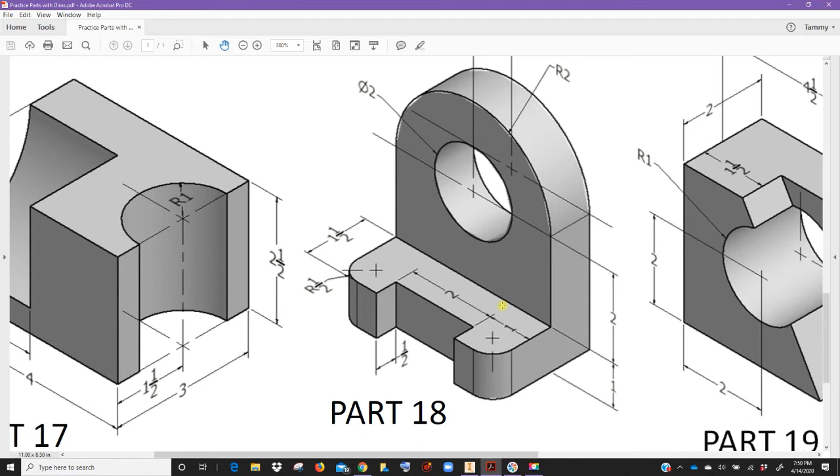It's up to you how you would like to draw this part. I'm going to draw it the way I think is easiest and that takes the least amount of steps. But again, you can do it many different ways. So let's look at part 18. So let's go to Inventor and let's start a new part. I'm going to start this on the front view. So I'm going to use the front view and start with that plane.

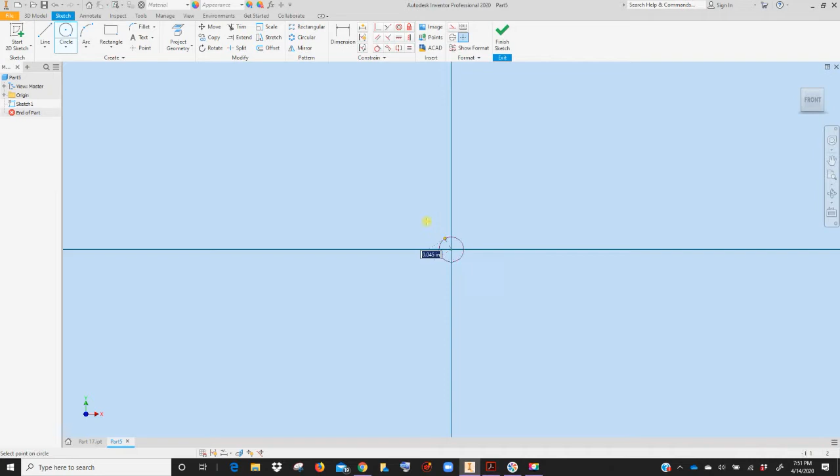So I'm going to look at my drawing. It tells me the bottom piece is 1 inch, then there's 2 inches to the center line, and then there's a 2-inch radius. So why don't we start with this 2-inch radius circle. And then I'm going to draw, see how I'm letting it just kind of grab and track back up. So let's trim this out.

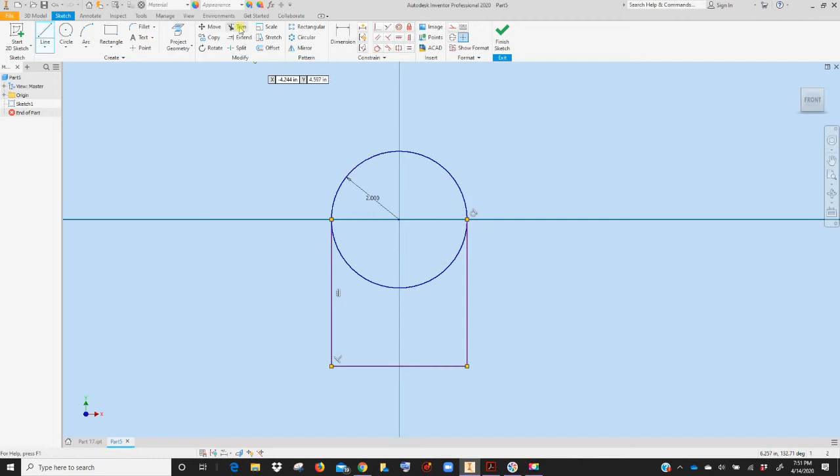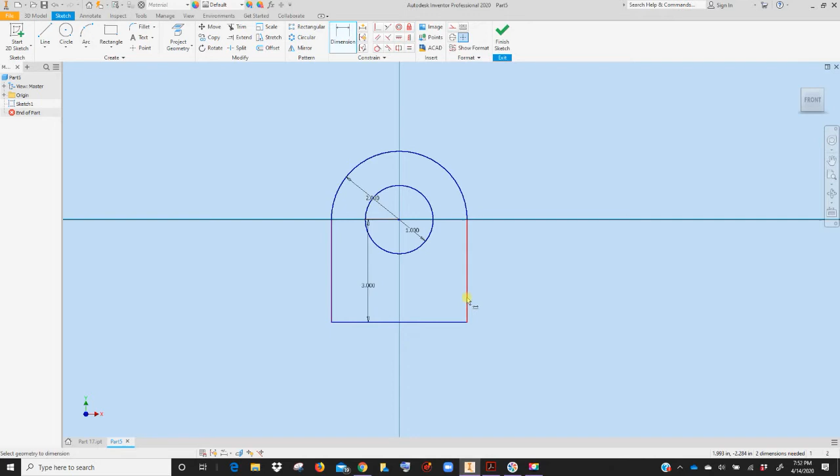And from here, I'm going to draw another circle. And that is a 1-inch radius. And then I need to put some more measurements, because from here to there should be 3 inches. So when I finish the sketch, I'm going to extrude this face out just 1 inch until this, okay.

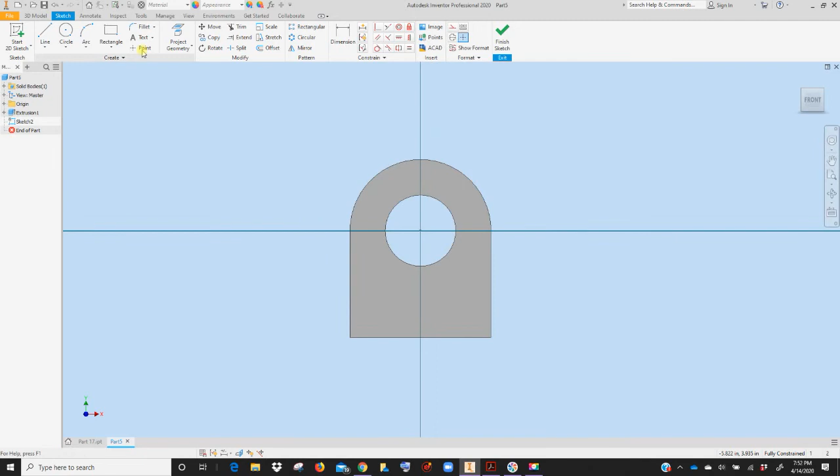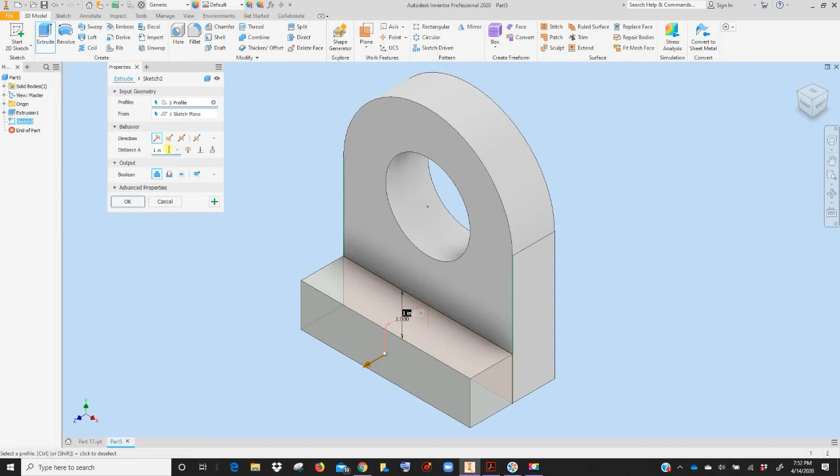Now I'm going to sketch on this front face, and I'm going to use rectangle. Whenever you need to kind of just draw a box on something, use your rectangle command, because that way it's all one piece. And you can just come in, and I have to tell this to be 1 inch tall. Now I'm going to extrude that out. And my measurements tell me that that is 1.5. Okay, so I have the basic shape.

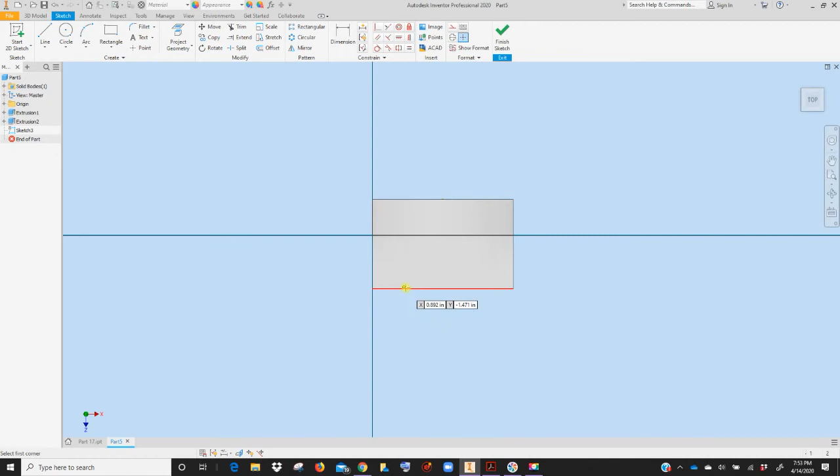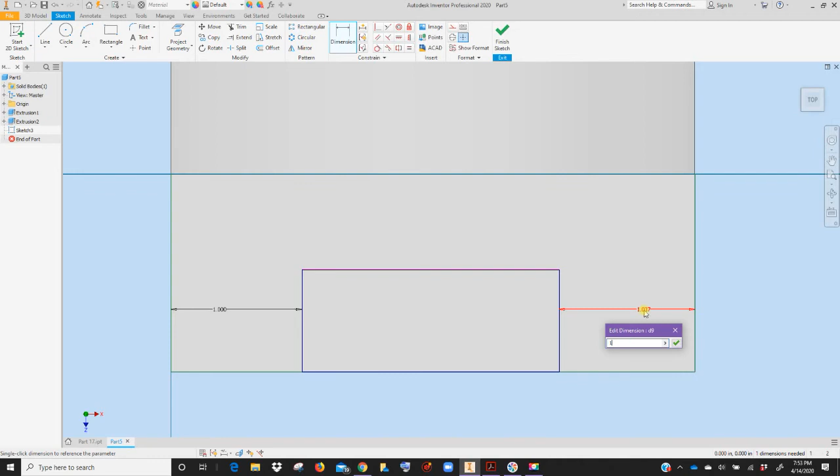Now you have an option. Do you want to sketch on the front face and draw a rectangle and cut it back? Do you want to sketch on the top face and make a rectangle and cut it down? It is up to you. I'm going to select the top face. Go to rectangle and draw the piece. Now you've got to remember to dimension it. So that's 1 inch. From this side is 1 inch. And from here to here is 1/2 inch.

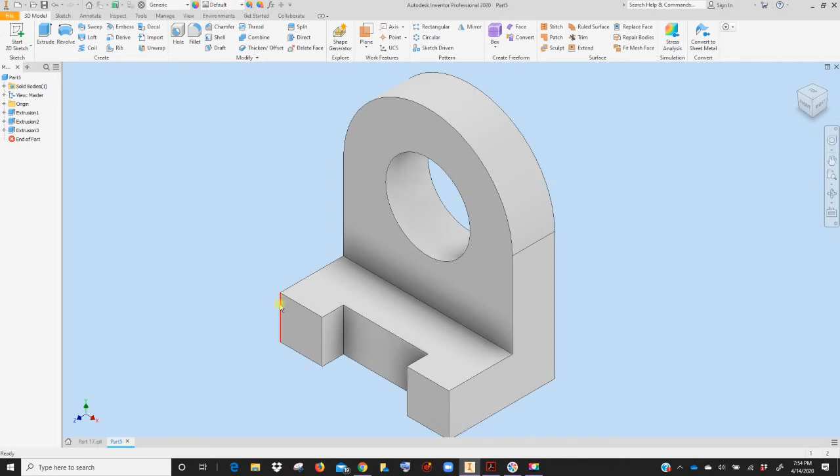Finish your sketch. And I'm going to cut through the whole thing and tell that okay. Now the corners are rounded, and it is a 1/2 inch fillet. So I'm going to use my 3D fillet to tell it to be a 1/2 inch. And there's your part. So when you finish this part, make sure you save it.

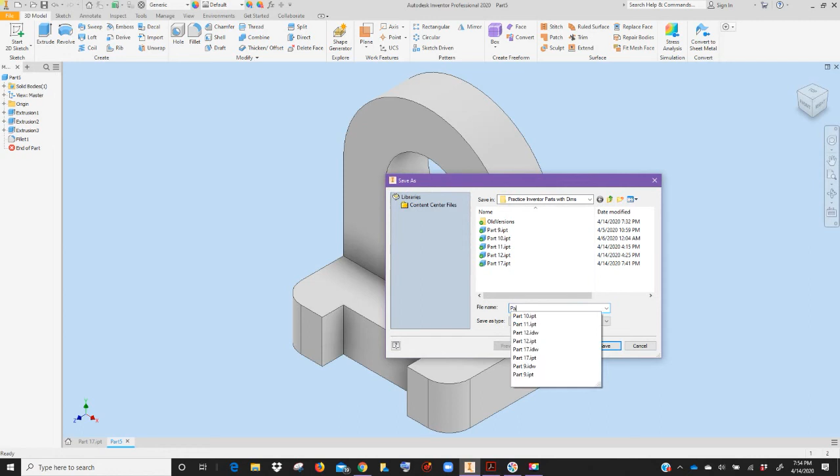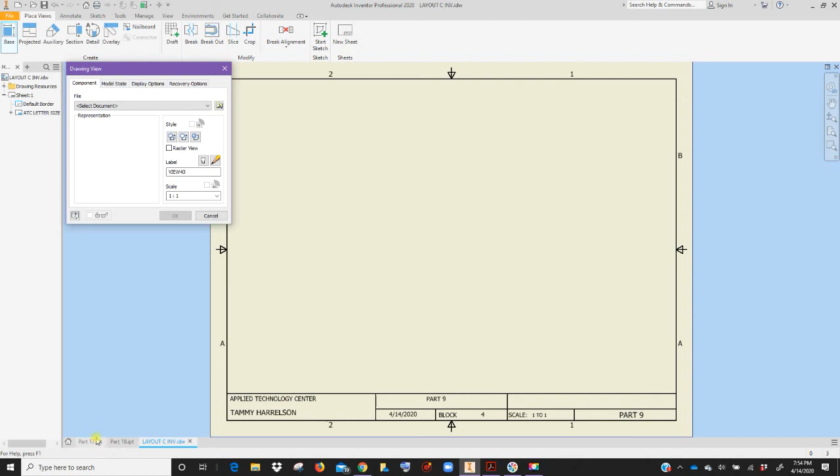Then you're going to go to your home and open up your title block. And when I click the base, notice it's not there because I have 2 drawings open instead of just the one. So I'm going to go out and I'm going to find part 18. Now, we're going to leave this at 1/2 scale. If I try to put it in at 1:1, it is way too big.

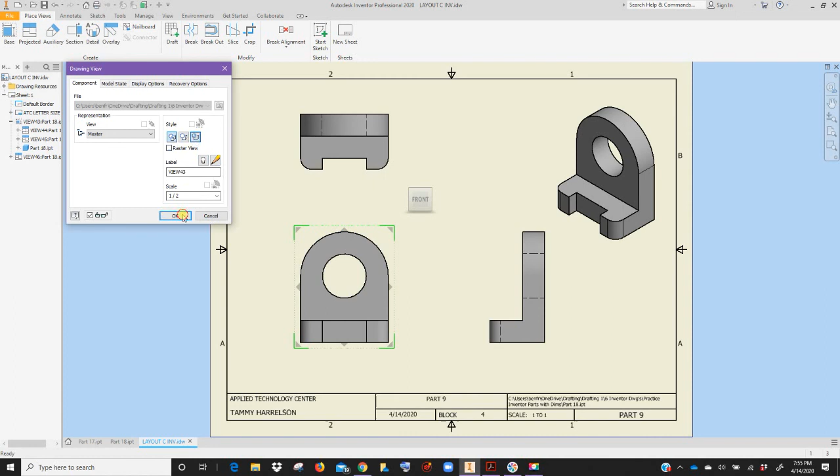So we're going to leave this at 1/2 scale, put in the top, put in the right, and you can put in your pictorial and it all fits. You don't have to adjust anything until that okay. And there's your part. Put in your center lines and your dimensions, edit your title block, and you're ready to turn that in to me.